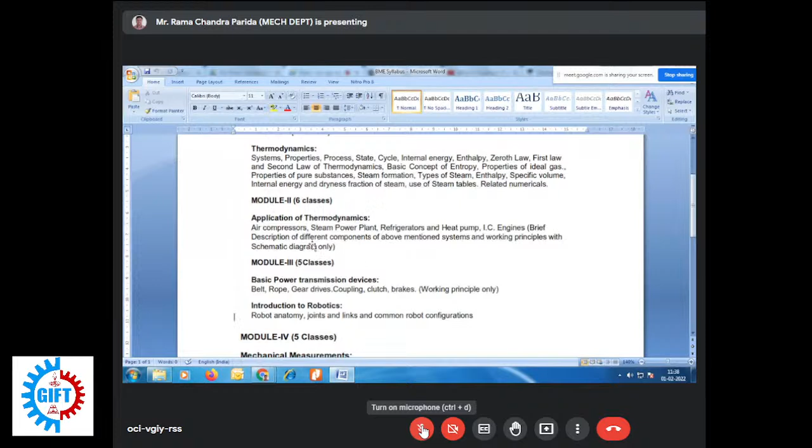You have to take the right one. Then from module 3, that introduction to robotics, that part robot anatomy, joint links, common robot configuration, along with your belt, rope and gear drive.

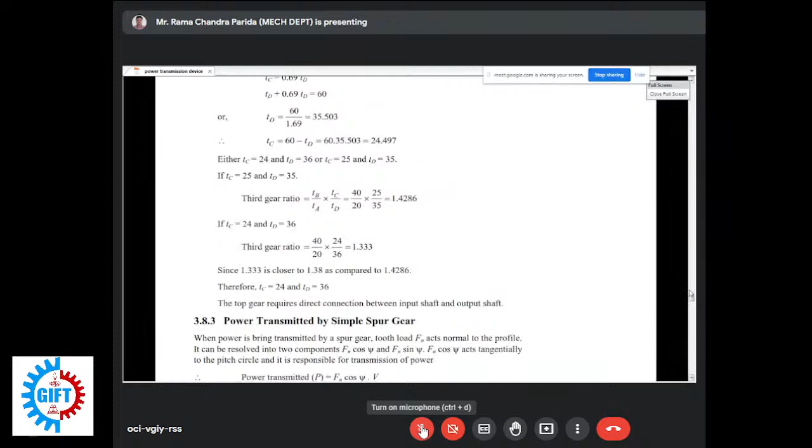ये वाला नोट्स भी along with that one I will share with you, you can write it on your notes, the portion what is included in your syllabus, okay, so that much you have to collect it from here.

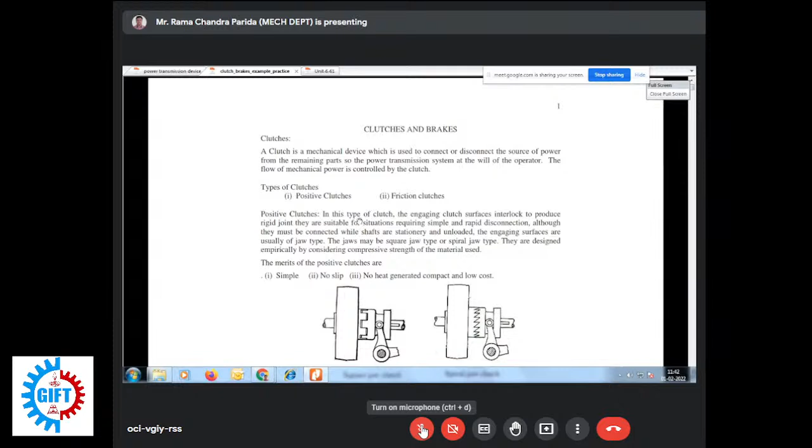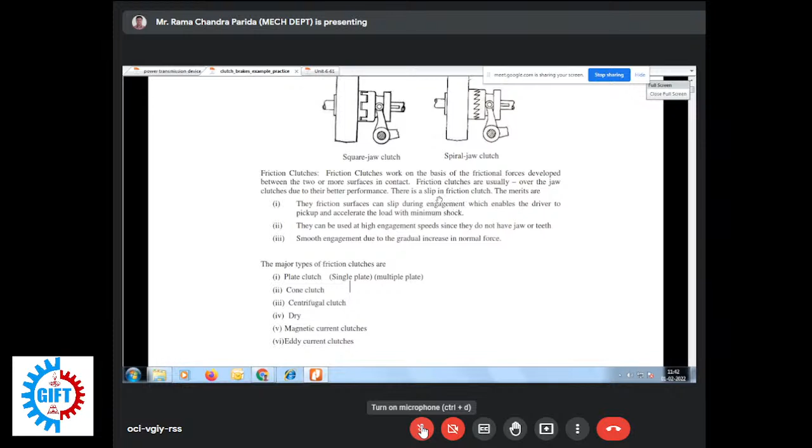So the power transmission system at the will of the operator, okay. So basically two types of your clutches we discussed, positive and friction clutch. So in positive clutch there is an engaging of clutch surface or interlocking occurred, because of which your power transmission takes place, okay. Then friction clutch, under friction clutch we have discussed several. Friction clutch works based on the frictional force developed between two or more surfaces in contact, and here there is a chance of slip, but there is no slip in positive clutch.

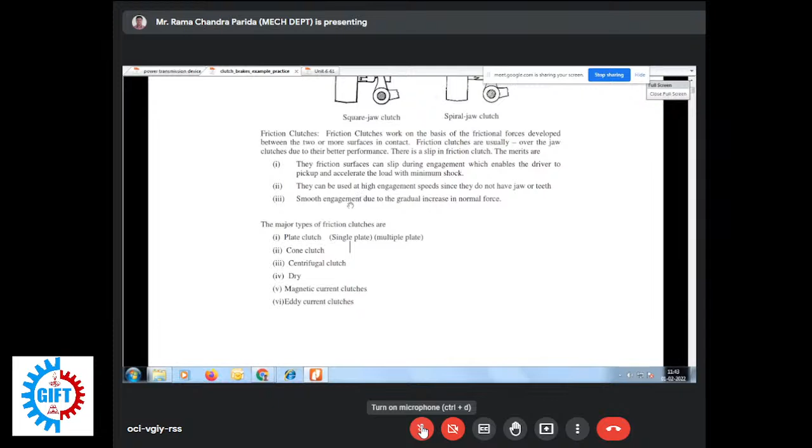So major types of friction clutches are plate clutch, under plate we consider single plate and multi-plate clutch, also cone clutch, centrifugal clutch also. These three will be in your syllabus I think, and eddy current magnetic clutches are not there. You have to consider positive clutch and friction clutch. Under friction clutch, single plate, multi-plate, cone clutch, and centrifugal clutch. Here only you have to remember the diagram along with its working principle. Beyond that, it is not included in our syllabus. Only diagram with working principle is required.

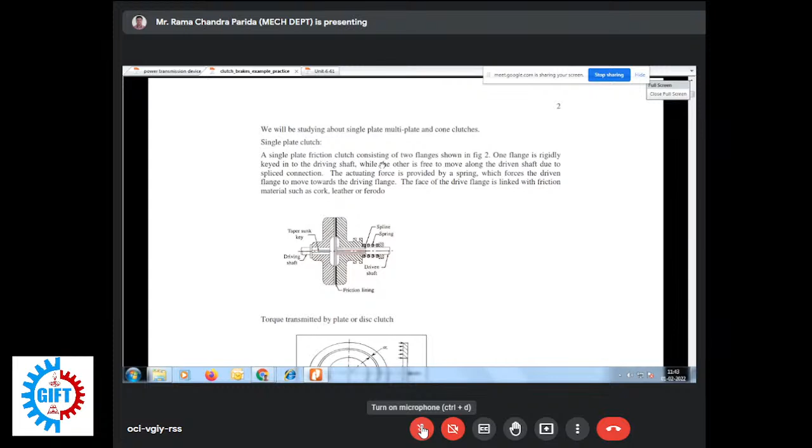So in single plate, as shown in this diagram, one is a driving shaft, another is driven shaft. Here one flange is rigidly keyed to the driving shaft, whereas the other is free to move along the driven shaft. This part is discussed. Okay, so this mathematical expression is not required.

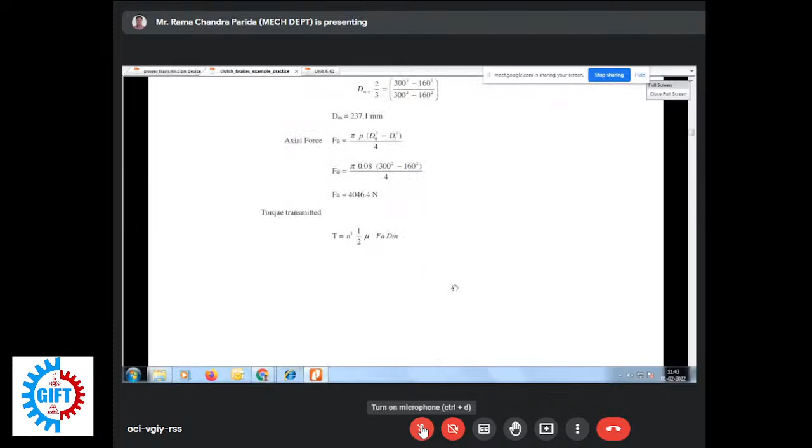Similarly, we discussed the multi-plate clutch and how it works, and we have already seen the animation for that. We also covered the cone clutch. Now let's move to the brake part, which is next in your syllabus.

So, how can you define a brake? Who can tell how you define a brake? A brake slows down the velocity of the moving wheel.

And what is a clutch? Clutch is also a mechanical device which is used to engage or disengage the power source from the transmitter to the other parts, that is, from the engine to the other parts. Whatever device is attached in between is called a clutch. Clutch can be of two types, already discussed. So basically, clutch transmits power from the power source to the other parts of the vehicle, for the power transmission purpose.

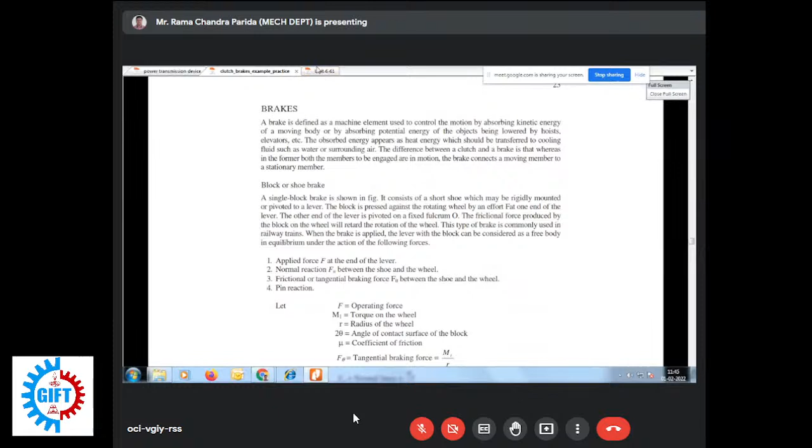But basically, what is brake? It is used to stop the motion of the vehicle. So there's another way we can define this. You can see this one.

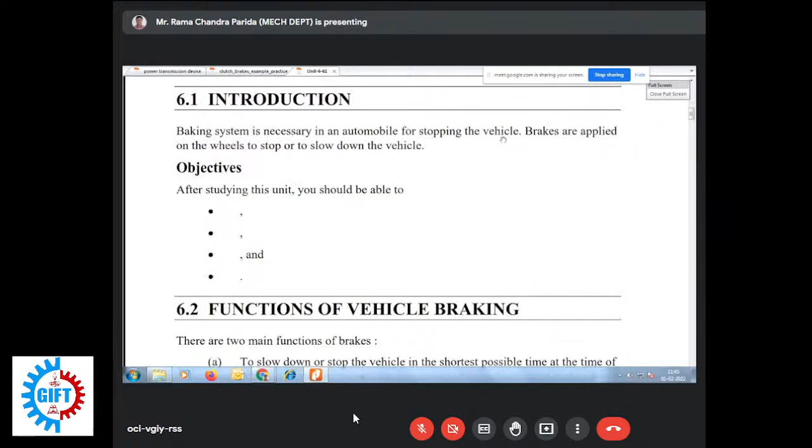I actually collected more notes for you. You can see that the braking system is necessary in an automobile for stopping the vehicle. Till now, whatever brakes we use in a cycle, bicycle, or motorcycle, basically it is used to stop the vehicle. This braking system includes the brake along with other components, and the objective is to stop the vehicle. Brakes are applied on the wheels to stop or slow down the vehicle.

Is the screen visible or not? Yes sir, visible. Okay, so in the braking system, brakes are applied on the wheels to stop or slow down the vehicle.

So next is, what is the function of a vehicle braking? This may also come in exams. What are the two main functions? To slow down or stop the vehicle in the shortest possible time at the time of need.

So you are not applying brakes always to your automobile. Whenever it is required, the vehicle should stop in the shortest possible time. This is the main objective of your braking system, is it not? Yes.

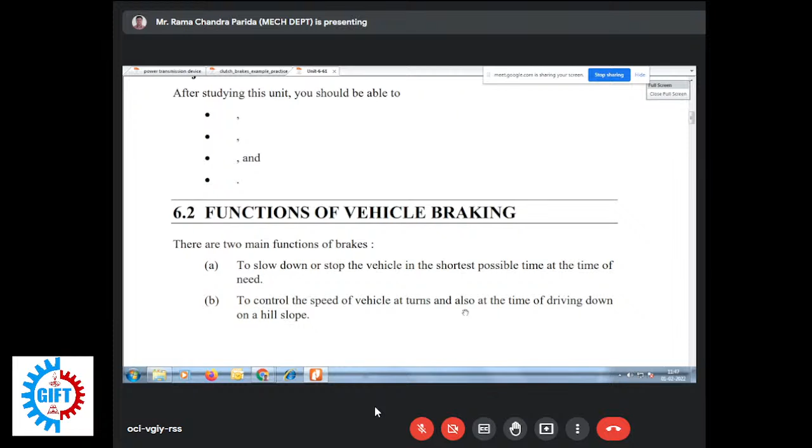Yes sir. So you have to remember these two definitions, what is the main function of vehicle braking: to slow down or stop the vehicle in the shortest possible time at the time of need, and to control the speed of the vehicle at turns and also while driving on a hill slope.

So that means the principle on which the vehicle brake works, and it stops. So braking of a vehicle depends upon the static friction that acts between the tire and the road surface.

It is wrong, it's a typing error, what is mentioned should be static friction, is it not? Are you able to find it or not? Yes sir, braking of the vehicle depends upon static friction, not this 'function' word, that's a typing error, and it acts between the tires and the road surface.

Brakes work on the following principle to stop the vehicle: the kinetic energy due to motion of the vehicle. When you apply the brakes, the kinetic energy of the vehicle is dissipated in the form of heat energy, due to friction between the moving part and the stationary part of the vehicle. That means when you apply the brakes, the kinetic energy gets converted or dissipated into heat energy due to friction between the moving and stationary parts of the vehicle.

The heat energy generated due to application of brake is dissipated into air. When you apply the brake, that sudden kinetic energy changes to heat energy, and that heat is transferred to the air, as heat is transferred from the system.

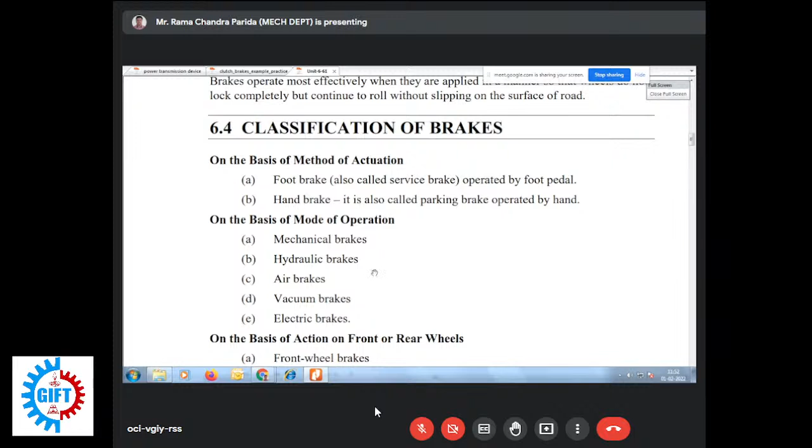Then, on basis of action on front or rear wheel, where you apply the brakes, or both wheels: if the braking arrangement is provided only in the front wheel, once you apply the brakes, your front wheel stops. So there is front wheel brake and rear wheel brake, and also both wheel brakes, which is coming as combo brake.

On basis of method of application of braking contact: when you apply the brake, the brake shoe comes in contact with the rotating part of the wheel. So how that contact takes place, whether it is internal expanding or external contracting, is the basis of this classification method.

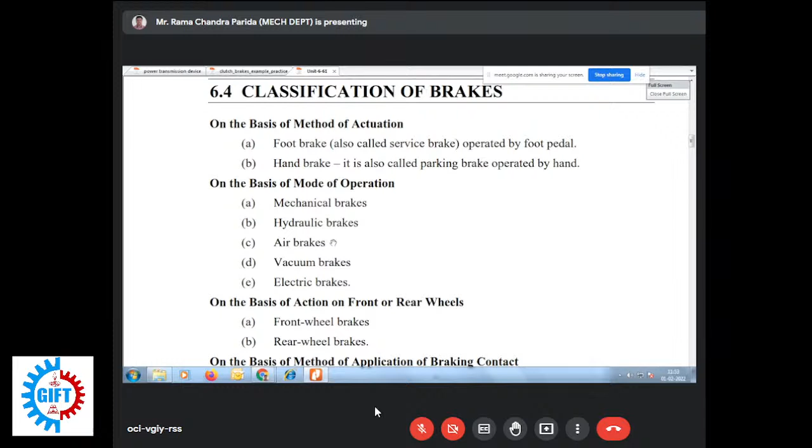So these are the classifications of brakes. First is on basis of actuation, foot and hand brake. Second is mode of operation: mechanical, or if it is with help of hydraulic fluid, it is called hydraulic brake, and if it is with compressed air, it is called air brake. Then on method of action on front or rear wheel, it is front wheel and rear wheel brake. And on basis of method of application of braking contact, it is internal expanding and externally contracting brake. So these are about classification of brakes.

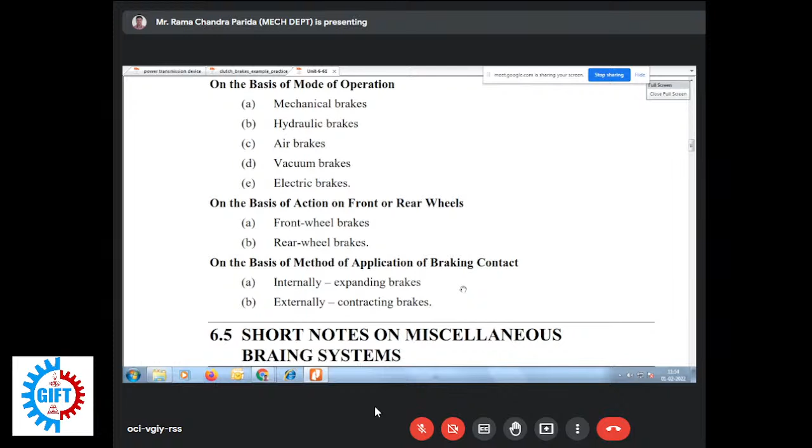So an air compressor is used to compress the air, and the compressor is run by engine power. Since a compressor is a work-consuming device and requires some work input to compress the air, that power or work input is supplied by the engine, in case of the braking system in a vehicle.

Vacuum brakes are a piston or a diaphragm operating in a cylinder. For application of brakes, one side of the piston is subjected to atmospheric pressure, while the other is applied vacuum by exhausting air from this side. So this way braking force is applied through suitable linkage.

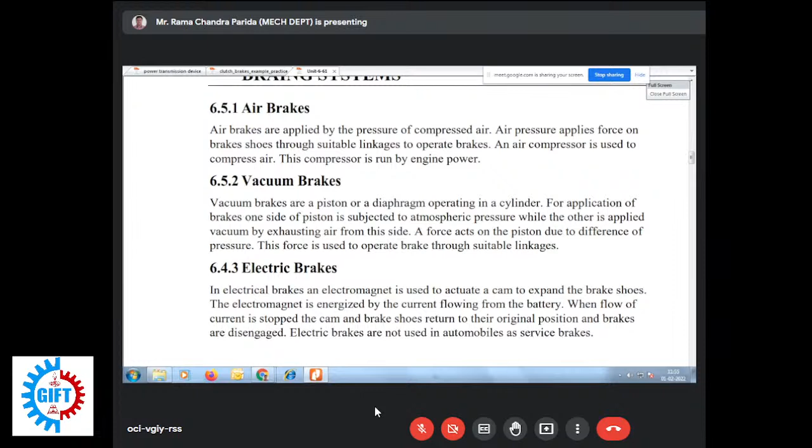Then this one is your electric brake. Again, this is not in your syllabus, I think.

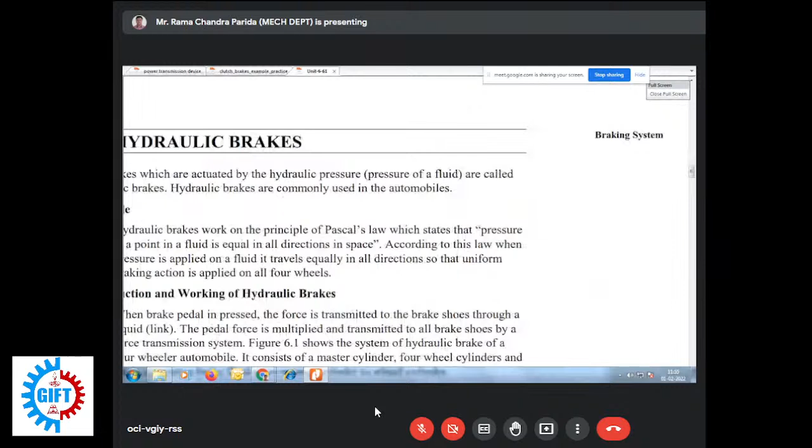Then come to air brake. After air brake, there is hydraulic brake. What is that, how diagram? I will show you the diagram later. Just see the brakes which are actuated by hydraulic pressure. This is compressed air. Brakes which are actuated by compressed air are called air brake. Similarly, the brakes which are actuated by hydraulic pressure are called hydraulic brake. These are basically used in auto vehicles.

What is the principle on which your hydraulic brakes work? Basically, it works on the principle of Pascal's law. It states that pressure at a point in a fluid is equal in all directions. Based on this Pascal's law, your hydraulic brake works.

So if we come to the construction and working part of the hydraulic brake, I will explain through that diagram. When the brake pedal is pressed, the force is transmitted to the brake shoe through a liquid. The pedal force is multiplied and transmitted to all brake shoes by a force transmission system.

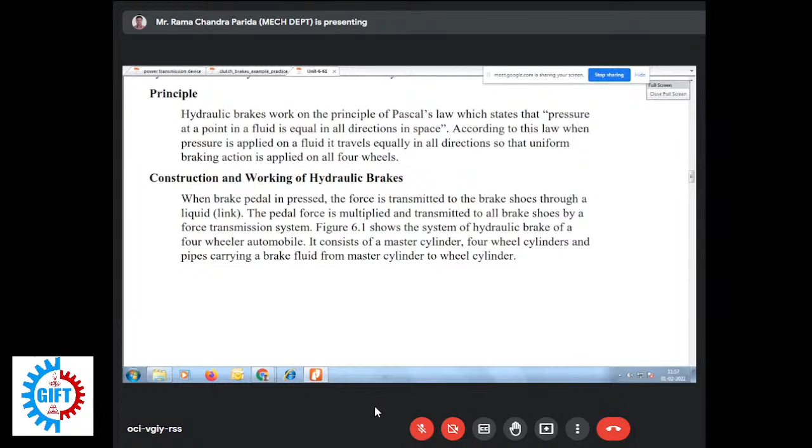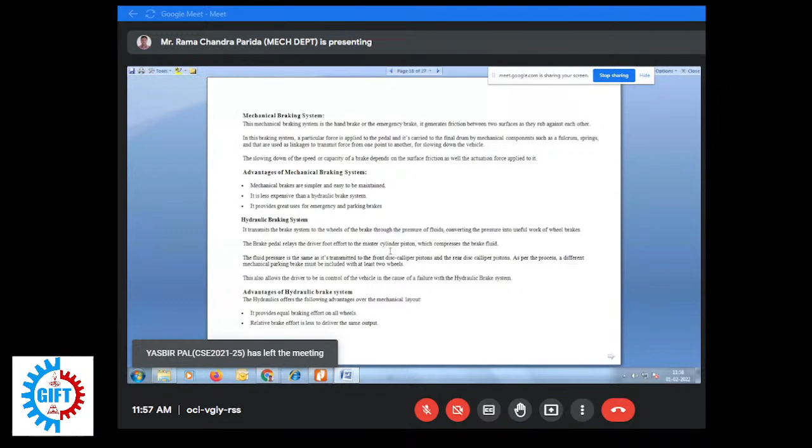When you press the brake pedal, the fluid in this master cylinder gets compressed. Once it is pushed, it moves through this hydraulic line. All this arrangement is fitted to all four wheels of your vehicle, and the force is multiplied and transmitted to all brake shoes by a force transmission system.

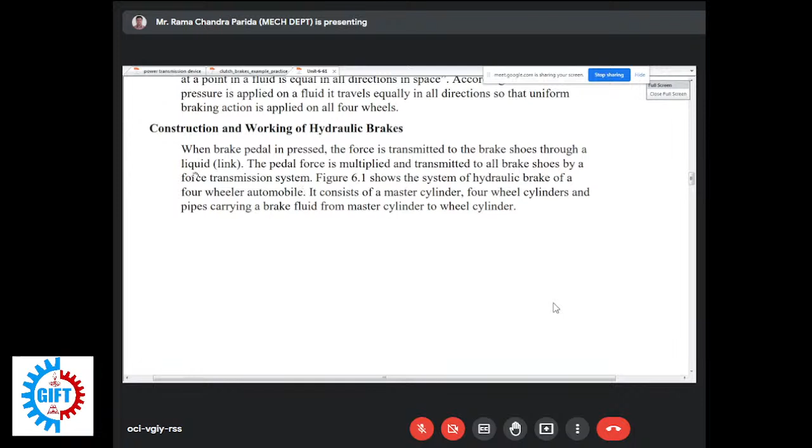If you find what is the advantage of using this system, it provides braking effort to all wheels equally, in comparison to mechanical braking. The relative brake effort is less - that means the force at which the driver presses the pedal, called brake effort, is comparatively less than in a mechanical braking system. It is more efficient than mechanical braking and suitable for all types of vehicles having an independent suspension system.

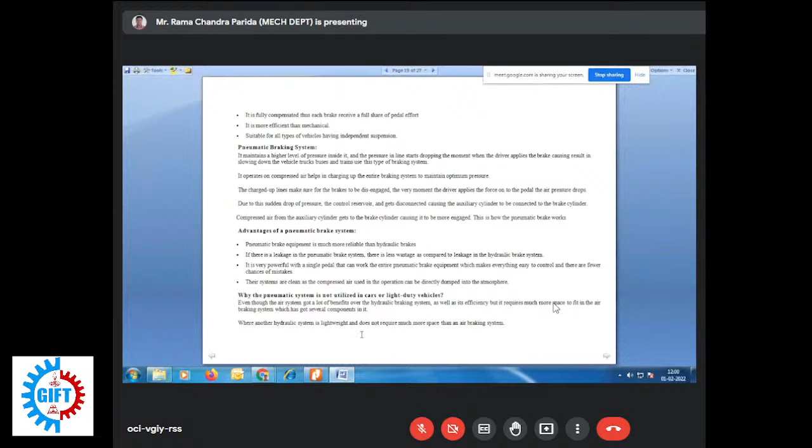So this is all about your hydraulic braking system. The master cylinder you can see from this diagram is connected to all four wheel cylinders by tubing or a piping system. All cylinders and tubes are filled with a fluid which acts as a link to transmit pedal force from the master cylinder to the wheel cylinder.

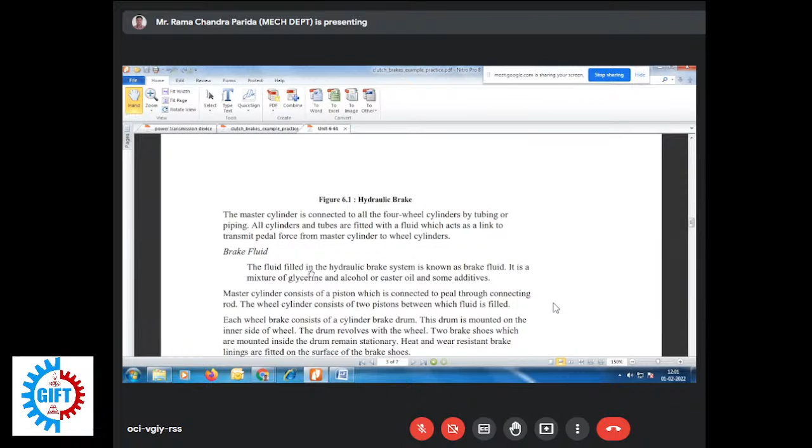The fluid used in this hydraulic braking system is called brake fluid, basically a mixture of glycerin and alcohol or castor oil with some additives. You have already seen in the diagram that the master cylinder consists of a piston which is connected to the pedal through a connecting rod. The wheel cylinder consists of two pistons between which fluid is filled.

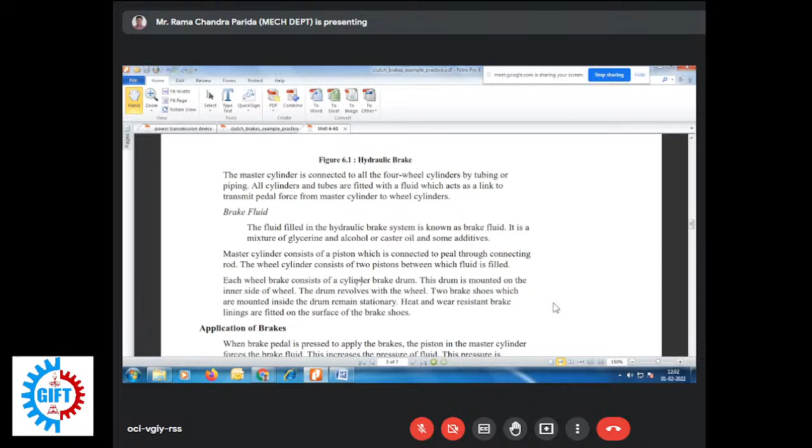How that works: when the brake pedal is pressed to apply the brakes, the piston in the master cylinder forces the brake fluid. This increases the pressure of the fluid. The pressure is transmitted in all the pipes and up to all wheel cylinders according to Pascal's law. This increase in pressure forces out the two pistons in the wheel cylinder, and these pistons are connected to the brake shoe.

So the brakes expand and work against the brake drum. Due to this friction between brake lining and the drum, wheels slow down and brakes are applied. So this way your hydraulic braking system works.

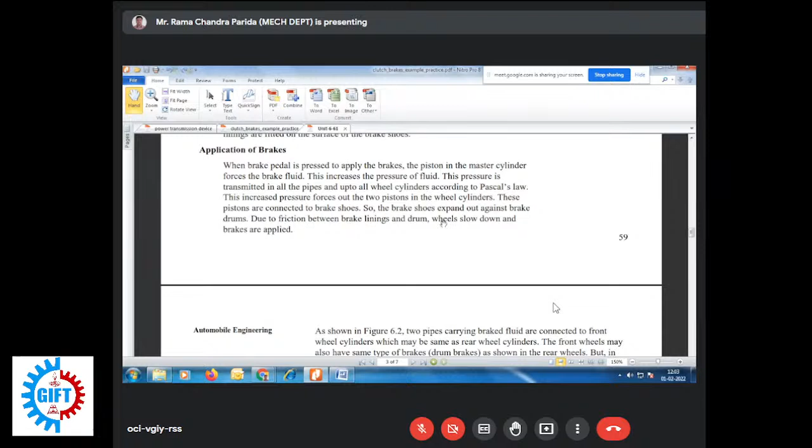So the brake shoes expand out against the brake drum. Due to friction between brake lining and brake drum, your wheels slow down. So this is all about the working of your hydraulic braking system. Whenever it is required, you press the brake pedal. When it is not required, you release the force from the pedal.

When the pedal is released, the piston in the master cylinder returns to its original position due to the retractor spring provided in the master cylinder. It is not shown in this diagram, but whenever you press the pedal, it moves, and then the master cylinder returns to its original position. Thus, fluid pressure drops to its original value.

A retractor spring provided in the wheel cylinder pulls the brake shoe during release of the brakes. So the contact between brake drum and brake lining is broken, and therefore your brakes are released. So this way your hydraulic braking system works, whenever you press the pedal and when you release the pedal.

So just see this diagram again. When you press the brake pedal, the piston in the master cylinder pushes the fluid here, and it moves to each wheel cylinder, and in the wheel cylinder this fluid pushes the piston, which presses the

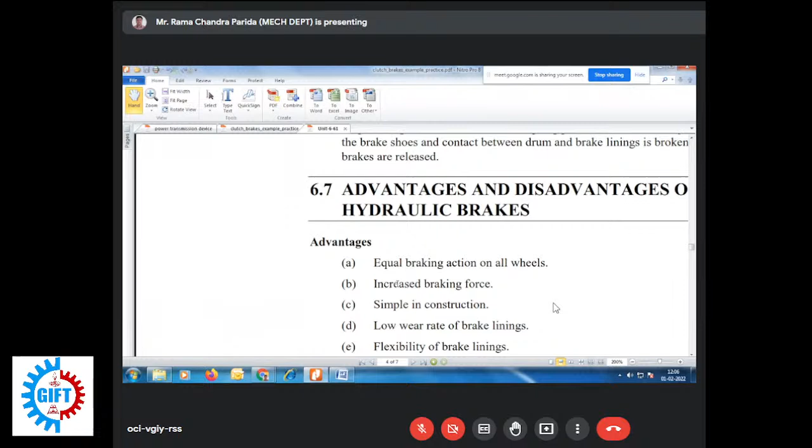Now some advantages of the hydraulic braking system: equal braking action on all wheels. This is the main advantage of the hydraulic braking system; all wheels get equal braking effort. Increased braking force, because the force transmitted through the fluid is multiplied, so braking force is increased.

Simple in construction, as there are no mechanical parts; it works only on Pascal's law and fluid pressure. Low wear rate on the brake, flexibility of brake lining, and increased mechanical advantage. Just remember: equal braking action on four wheels, increased braking force, simple construction, and low wear rate.

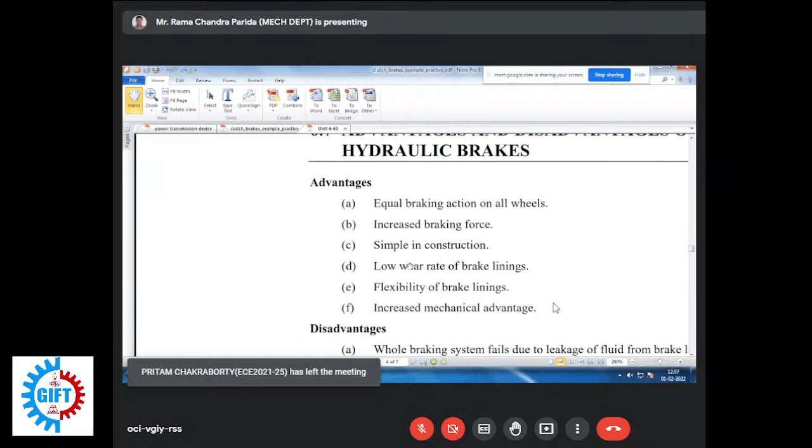But there are still some disadvantages associated with the hydraulic braking system. Since it works only by fluid pressure, presence of air inside the tubing may ruin the whole system. So two things to remember: once fluid leakage occurs, your whole braking system fails, and presence of air in the tubing ruins the whole braking system.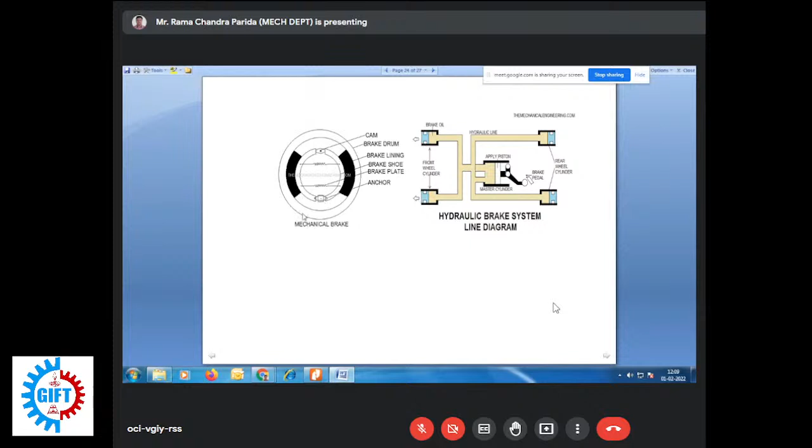This is your air brake, hydraulic brake and mechanical brake. You can see now. This is not required. I think this is servo brake.

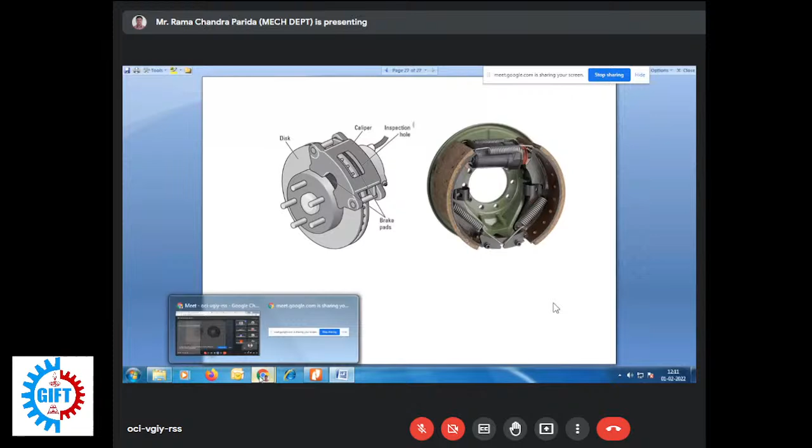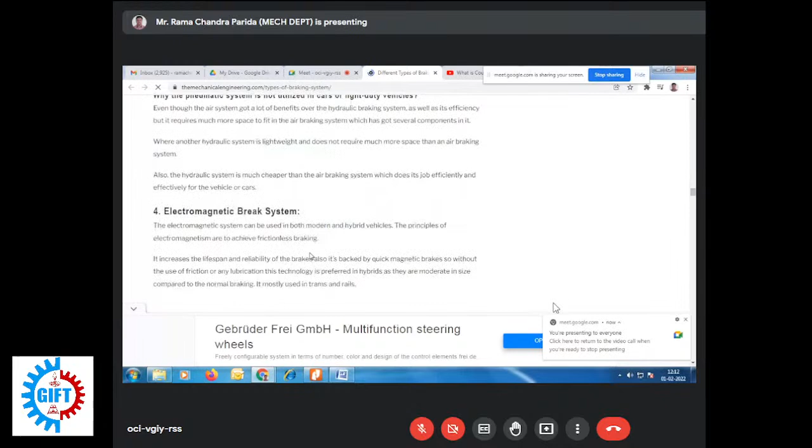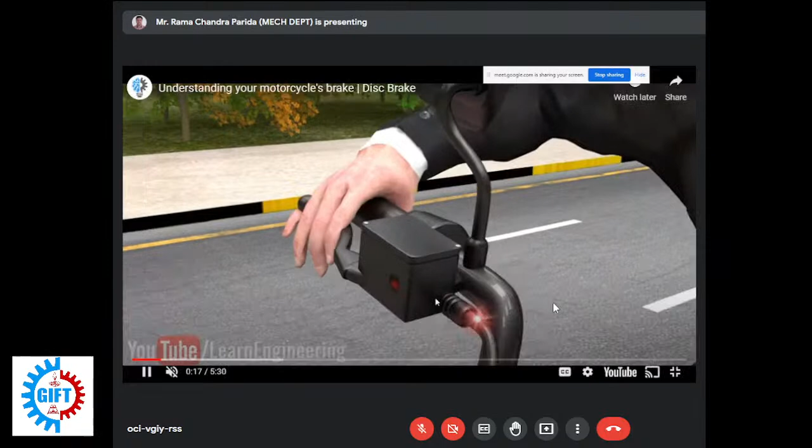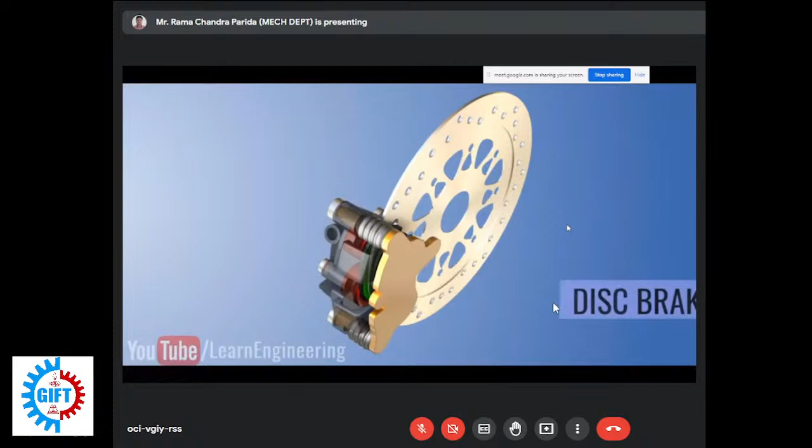You can see. Just wait, I'm coming. This one is your disc brake. You can see how it stops, the working of disc brake. You can see now how, when you apply the brake fluid from this one, able to see it or not? Okay, see it. A disc. Now that fluid is pressed. Now it stops. When you press this one, how it stops.

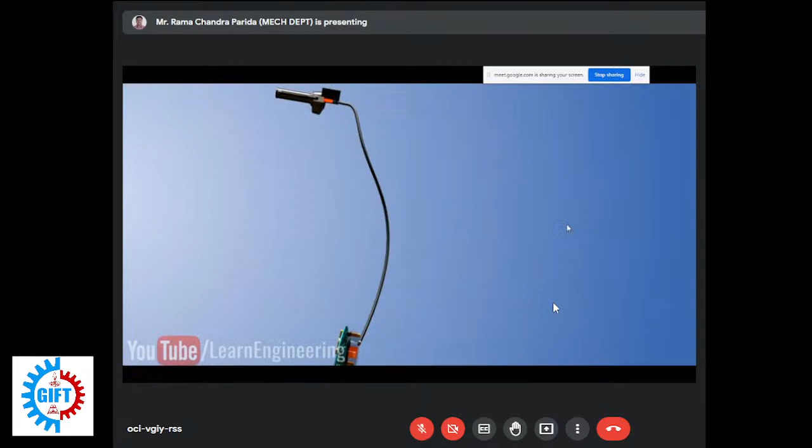Yes, sir. Okay, you can see the pipeline now supplies the fluid at pressure. Small piston is there. Now here what happens? Here big piston is there. That is your disc. Now you can see P lever equal to P brake.

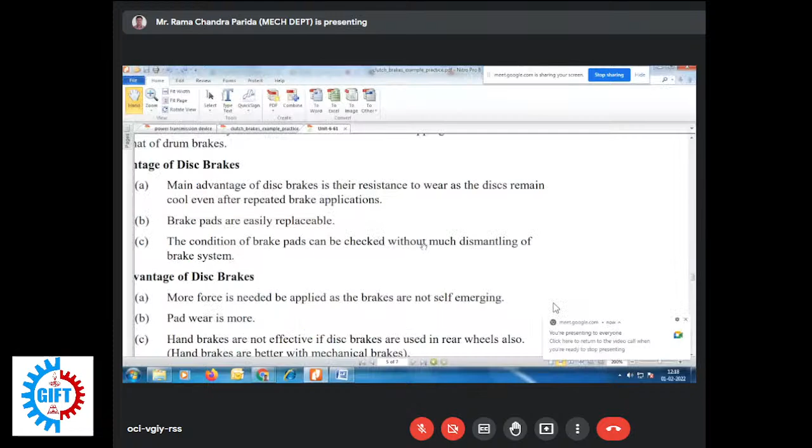So this is all about your braking system. Okay. So basically you have to remember one is drum brake, disc brake, and that is hydraulic brake. Modern cars are fitted with the disc brake. You can see this one is the disc brake, and that one is your drum brake.

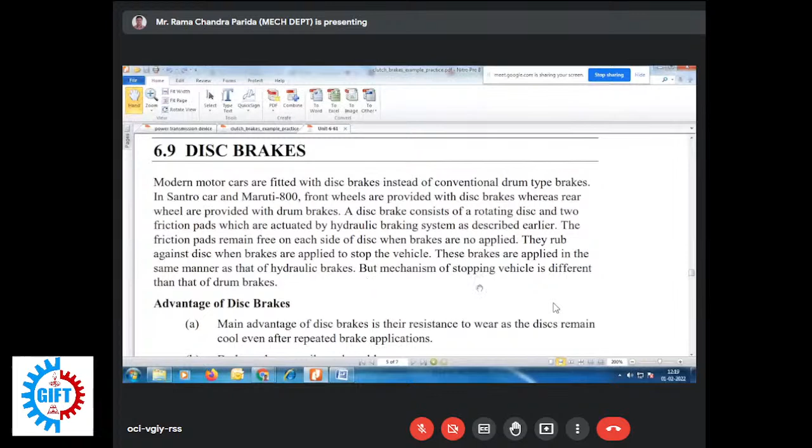So the advantage of a disc brake is better heat management, meaning better cooling, because of that metal disc. The main advantage of disc braking is their resistance to wear, as the disc remains cool even after repeated brake application. Better heat management, as I already mentioned. Similarly, brake pads are easily replaceable here. The condition of the brake pads can be checked without much dismantling of the brake system.

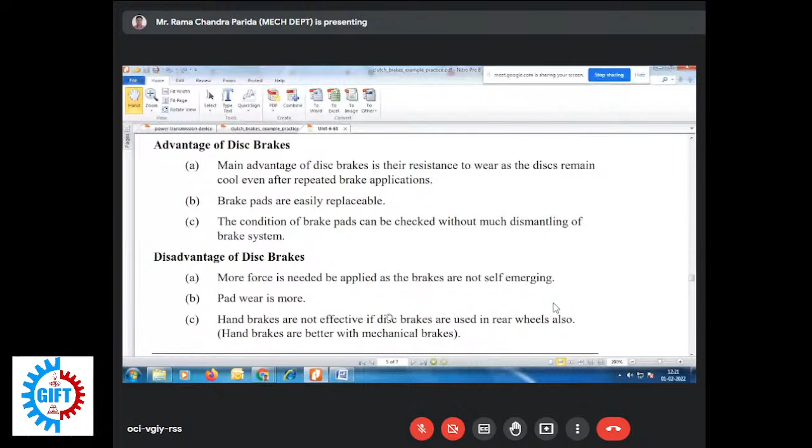Okay. Then parking or emergency brake, these are the hand brakes you can remember. Bleeding of brake means it is the process of removal of air from the braking system.

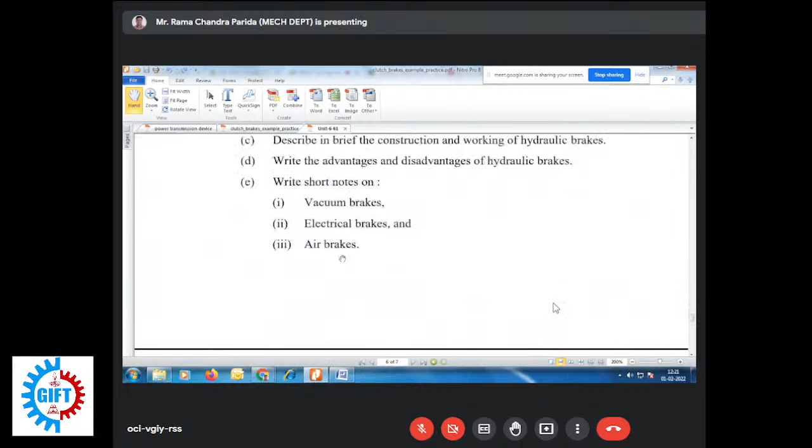So these are the things you have to remember. Okay. So next one, anti-lock braking system, to roll it without slipping or skidding. That is the need of this one. You can see this is coupling. What is coupling? You first understand, then I will.

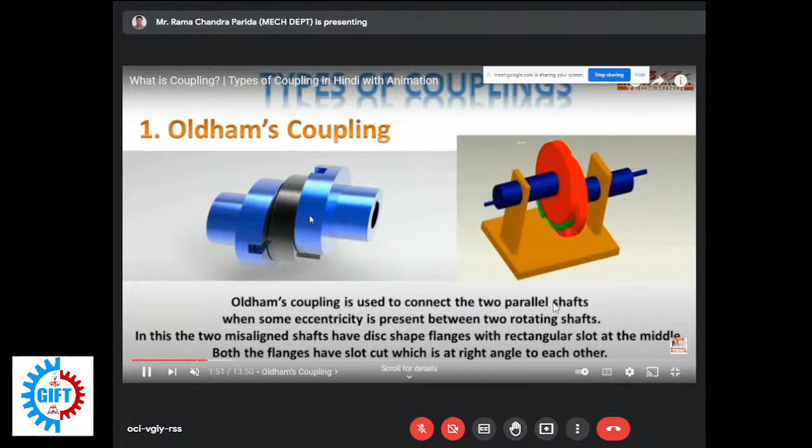Your driving flange is there, driven flange is there, so there is a tongue placed in between them. Here, this one.

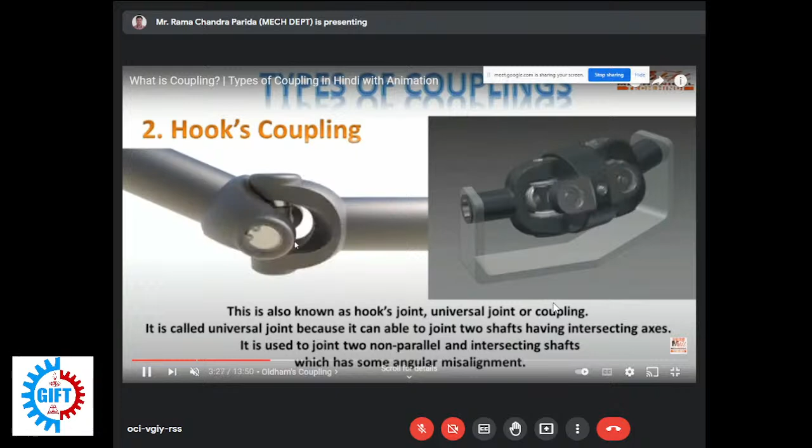Here you can see one is driven, another is driving shaft. Okay, so you can see this way.